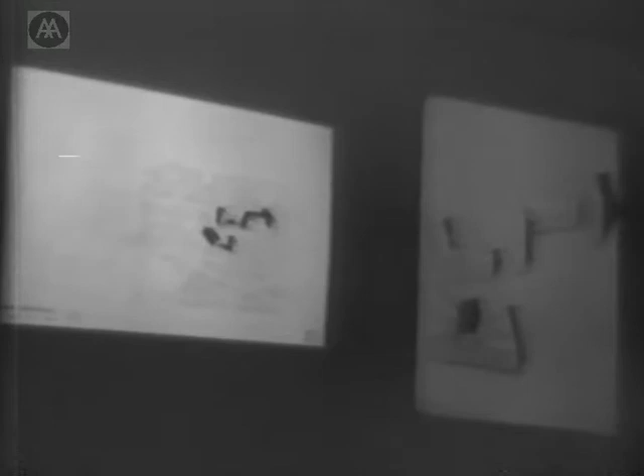Today I want to briefly talk about Twin Parks Northeast housing in the Bronx, which began shortly after I had completed the Westbeth artist housing. Westbeth was 13 interconnected buildings that used to belong to the Bell Telephone Company in West Greenwich Village. It was a rehabilitation of those laboratories and offices for artist studios and residences, in which in 1968 we created loft-type spaces in which the residents could adapt the interior of the space to their own needs.

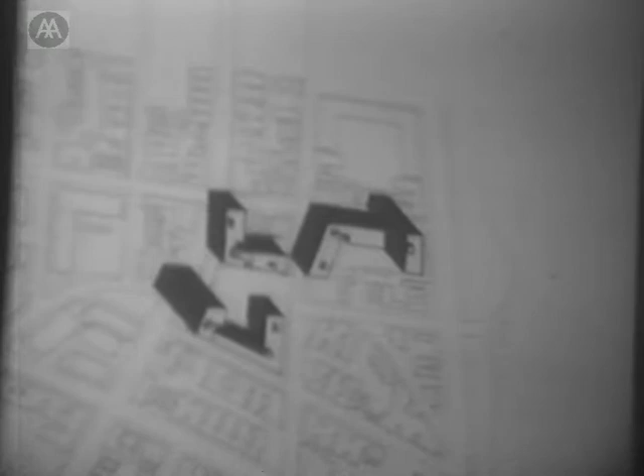So when we began Twin Parks for the Urban Development Corporation, it was hoped that some of the breakthroughs we had made with the Federal Housing Administration in terms of eliminating their specifications for room sizes, size of closets, size of doors, location of hardware, etc., could be carried through into public housing for low and middle income people that were not in a specific category, such as Westbeth was, everyone said, well, it's for artists, so you can do something there.

So we tried to carry through some of those ideas into Twin Parks, but we met with enormous opposition in terms of just making lofts in which people could then put in partitions and divide the space as they were. So these are pretty ordinary standard apartment units.

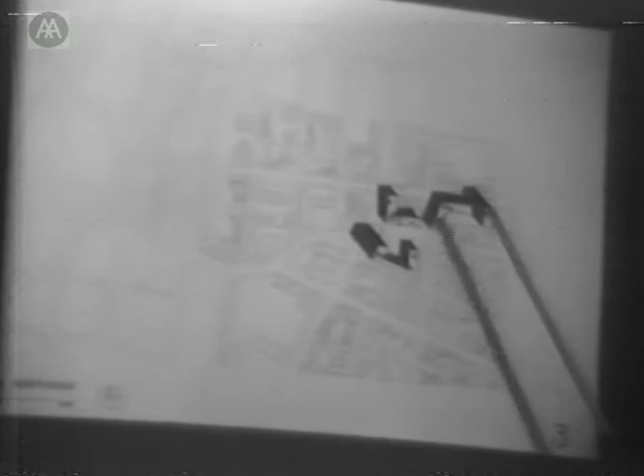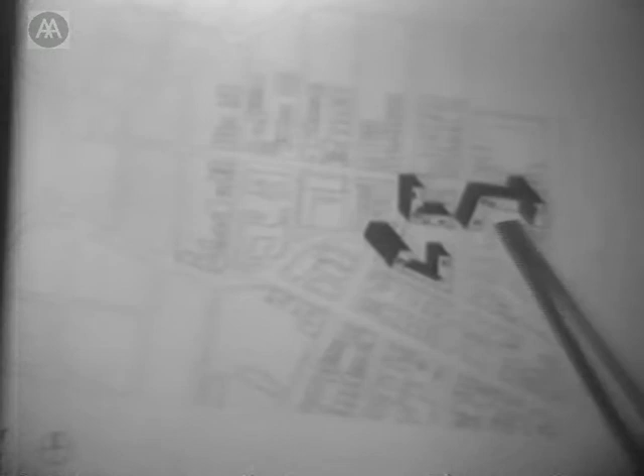The sites, and this is called scattered site housing, is on three pieces, 3 blocks, in which there's a shift of grids from the south to the north. And what we tried to do was to recognize the grid to the south in the Bronx as well as the grid to the north.

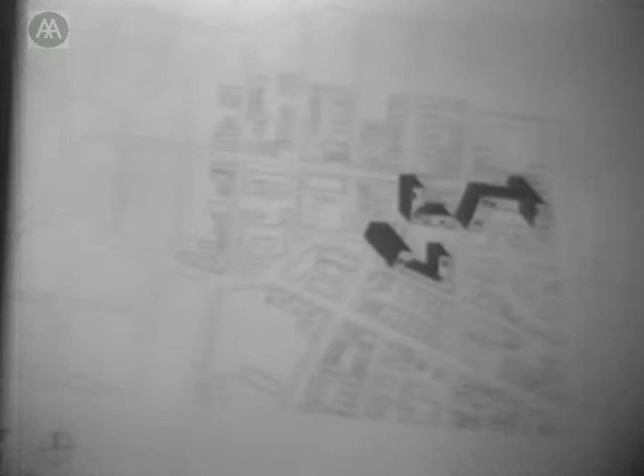We created a series of buildings which made for a new open public space, a plaza over a car park area, in an area which was totally devoid of any open public space. So the new open space existed in relation to housing which is all around.

Now, the study model shows one of the other things we were trying to do, since the units kept getting smaller and smaller because the FHA minimum room sizes became the UDC maximum allowable room sizes. So the one amenity we felt we might achieve within the individual dwelling units was to give the maximum amount of light and air. In the model, you see the way it was designed in terms of the glazed surface to the solid surface. Of course, this is not the way it was built.

We went through about 2 years of fighting, and finally - I won't go into the whole history of how the UDC was organized and functioned - but the building contractor was in fact then the building's owner. He became the developer, and although one did working drawings and got all the approvals from the appropriate authorities, when it actually came to build the building, he said, well, I'm the owner and I'm going to build it the way I want, and if I don't want to make so much glass because people will break it, and operable windows are more difficult at the size you designed.

Now, the second project I'd like to show you quickly is something which is still under construction, and which is also for a state organization, Mental Hygiene Facilities Corporation of New York State. None of these state organizations exist any longer, or if they do, they don't have any building program. There are no social programs at all in the northeast portion of the United States, but there used to be. And this was called a school. In fact, it was partially a hospital and partially a school, and originally was designed for 750 residents. Of course, we knew at that time it would never accommodate the full residential population, and that in fact these two units would never be built.

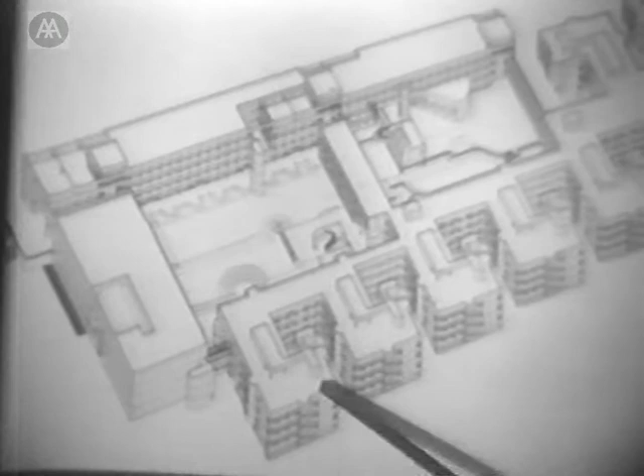So it was designed for 6 residential units on one side of the courtyard in relation to the educational, therapeutic, and outpatient services and physical education and administrative spaces. In fact, the program was cut back for 380 residents, and there won't even be that number now, because much of this will be used for outpatient services as well. But what is now built are the 4 residential units, as well as all the outpatient, therapeutic, and educational services.

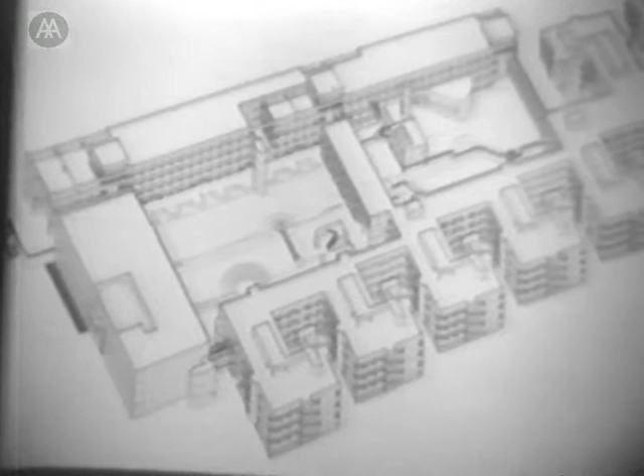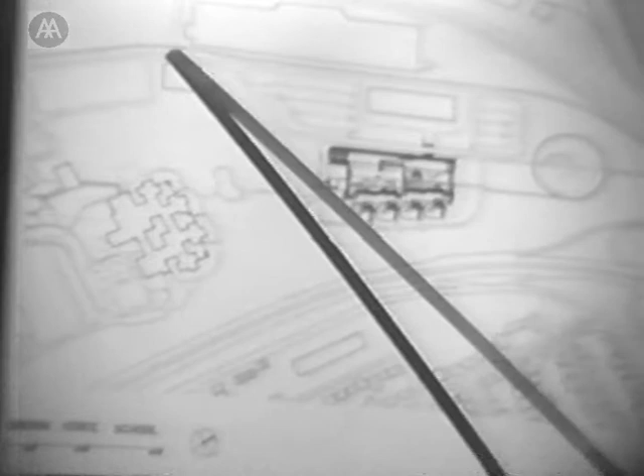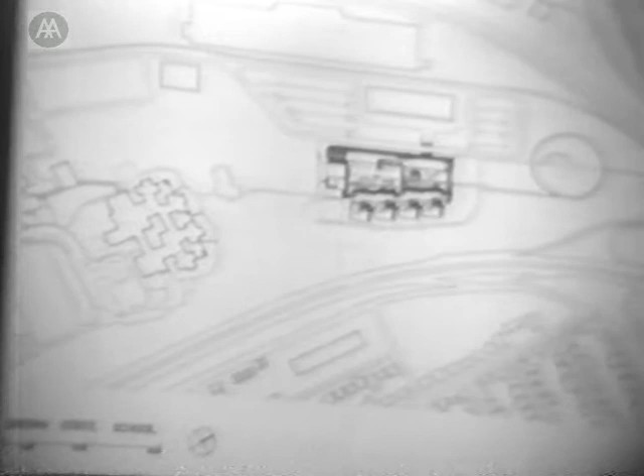Now, the building, as I mentioned, is basically organized with a long building which has a cafeteria, 3 points of entry, which then move through, 2 by bridges across the courtyards, and 1 through a bridge through the physical education facility and into the residential units. The building turns inward, as it were, into the courtyards, creating its own context. It's not like Twin Parks, because here there are no relevant architectural points. There's nothing to relate to. It's a building in isolation.

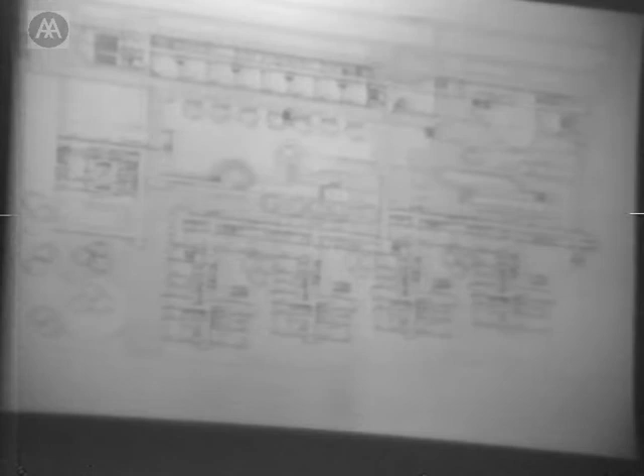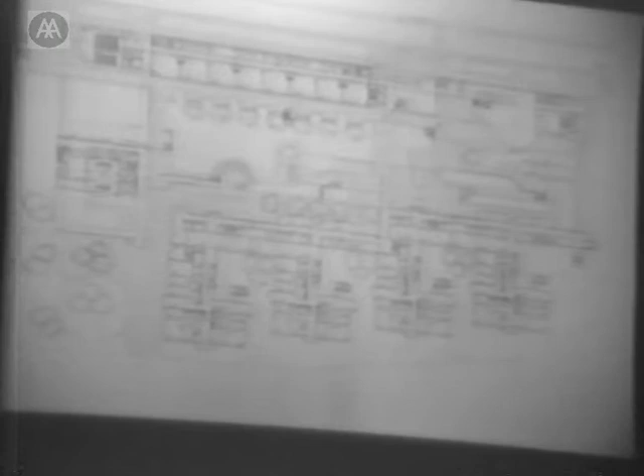And so the context is one which it creates within itself, so that when people come out, they're not on the highway. There's this feeling that people are going to get killed by crossing the highway. That from the classrooms and the outdoor classroom areas, as well as from the residents, on 3 of the 4 floors, the handicapped and physically disabled can get to ground level by ramps.

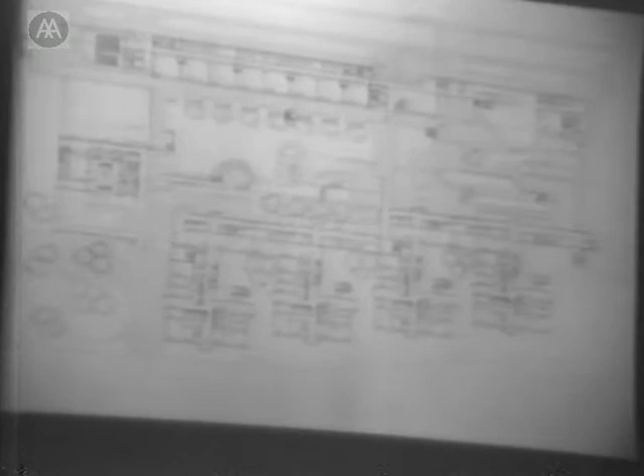Now, this is one of the residential units, and a view from the north with the support services spine then linked at the north end to the residential units.

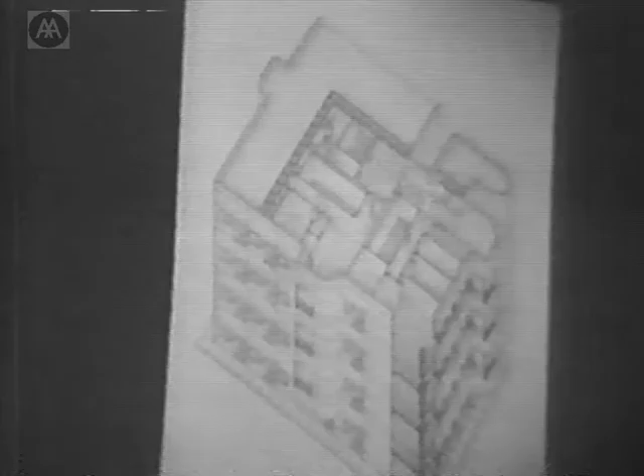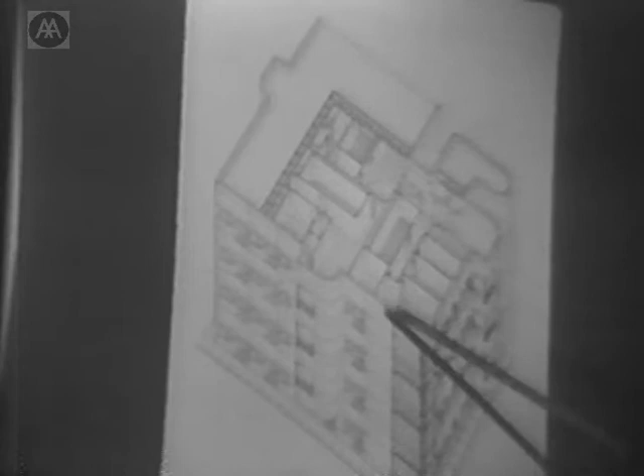This is an axonometric of one residential unit, divided with 4 levels, and within each level there is an apartment for 8 people, a two-bedroom, 4-bedroom arrangement pinwheeling around a nurse's station, so that each of the 8 people have their own living room, bathrooms, and bedrooms. Each of these 3 apartments for 8 makes 1 living unit for 24, which then has its own dining facilities.

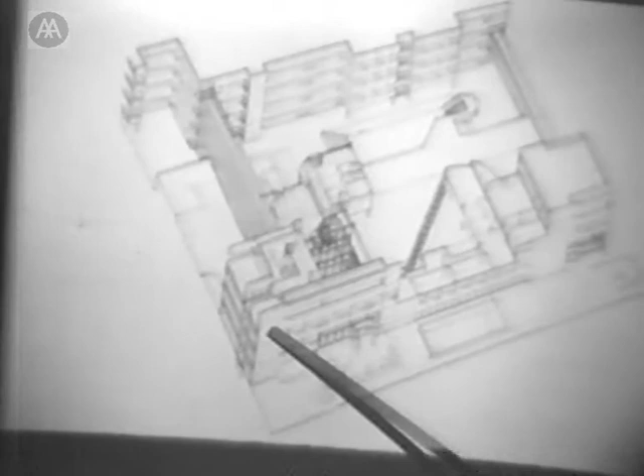Kitchen, and activity spaces. In this drawing, which is an axonometric cut through a portion of the support services spine, one sees the cafeteria, which opens out into the northern courtyard, and a small house, which is a domestic training house.

It's a place which has a bedroom, a sewing room, a kitchen, to simulate what a kind of normal, quote-unquote, environment might be, so that the residents who come here either for a short time or even for a long time can learn to function in the Bronx where they live.

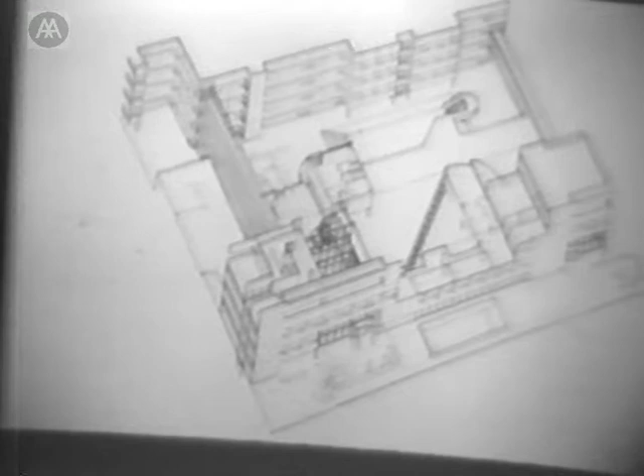Most of the people would come from the Bronx and go back to live in their apartments with their families there. The residential units are also designed so that they can be used by families as an overnight situation where families can come, stay with their children, and then return home, or that it can also be used for outpatient daycare clients as well.

Throughout the building, the aluminum panel curtain wall is designed to accommodate either the heating cooling unit or glass, so that at any time in the future, should a space need be changed in terms of its function, one just plugs in a new cooling heating unit and removes the glass.

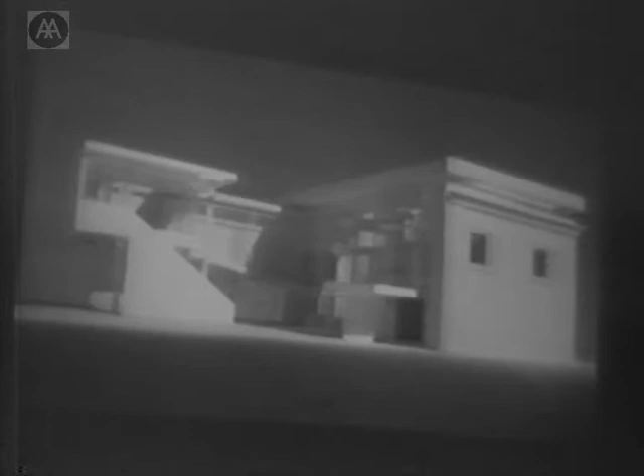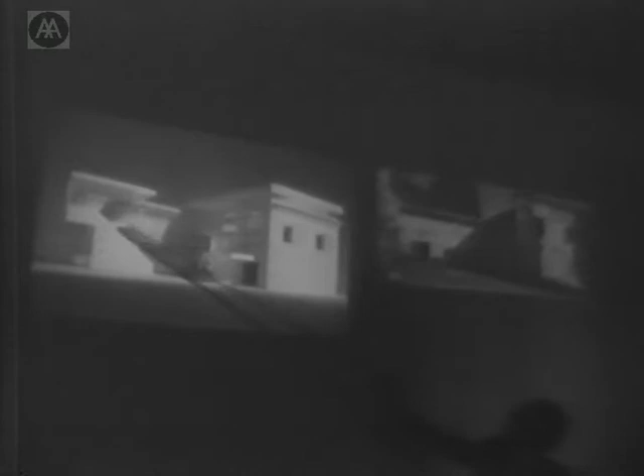But in order to get 3 levels of gallery space within the stable buildings, we lifted the new roof above the cornice line, in order to be able to pull across and ramp up to a gallery space, which then continued to the 3rd level, keeping the enclosure on the courtyard that had existed there with the stable buildings.

When I was asked to be the judge and jury for the Shinkenchiku competition in Tokyo, I was working on what's called an Atheneum, a visitor's center in New Harmony, Indiana.

New Harmony is a town which was settled first by the Rappites and then by Robert Owen in 1824 in southern Indiana, and is probably the only built utopian community in America. In 1825, there were about 950 people who lived there, and today the population is about 955. So it hasn't changed much in the last 150 years, except that it was a fairly poverty-stricken community.

The farming, which was the basic occupation for most people, has gone bad, so that about 7 or 8 years ago, they realized that what they had and what was unique about it was that it hasn't changed very much. And from a tourist point of view, it was fairly interesting.

A man came to New Harmony with some funding from the Ford Foundation and the Owens, and saw the possibilities of making a kind of Williamsburg of the West, so that all of the existing houses were put back where they were originally if they'd been moved, and restored. Although it's not like Williamsburg in that people walk around in costumes, people actually live there today and function there today in a normal manner.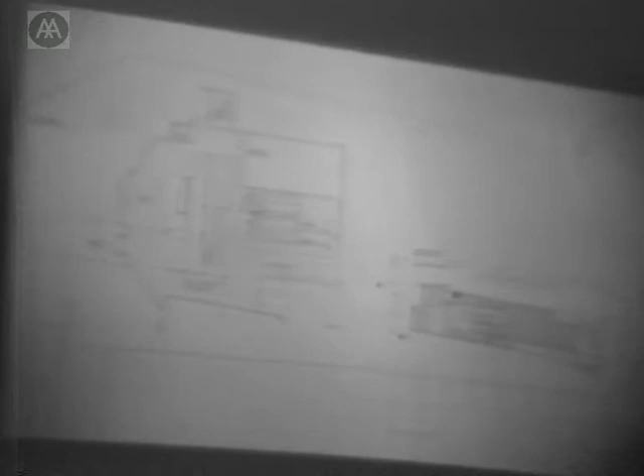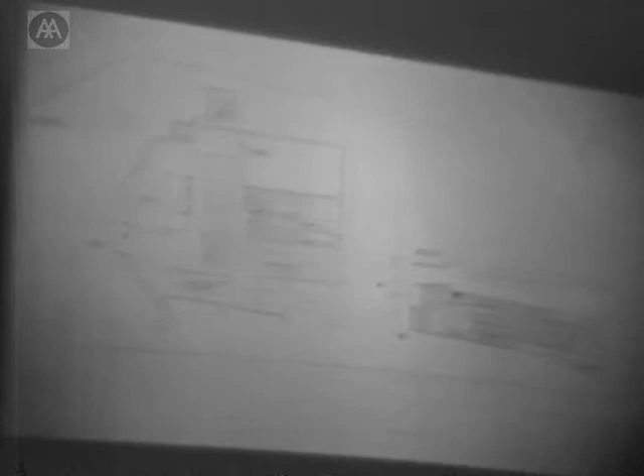The one new building they needed was a visitor center. This building, which is just beginning construction now, is based on circulation, because they expect 5,000 visitors a day to move through it to see a film on New Harmony and then take a walking tour of the town. Whether it will actually happen that way, we'll have to wait and see.

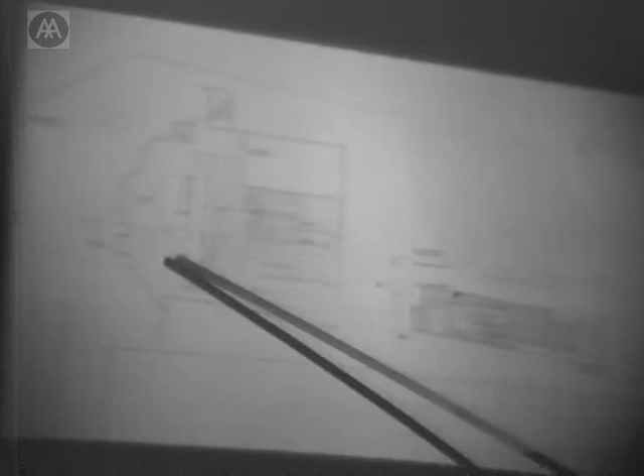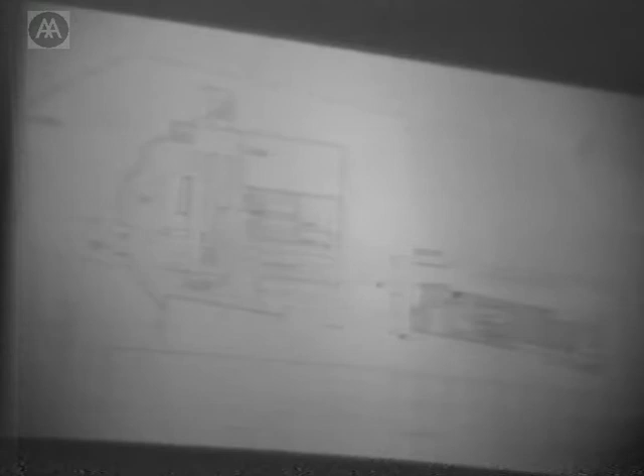At any rate, it exists on a plain where the Wabash River bends around a cornfield, and one comes in, enters, and buys a ticket to the film and the tour of the town, and ramps up to a theater which is above this portion of the ground level, and sees a 15-minute film on the history of New Harmony, then goes through a number of exhibits which exist at the ground level and the upper level.

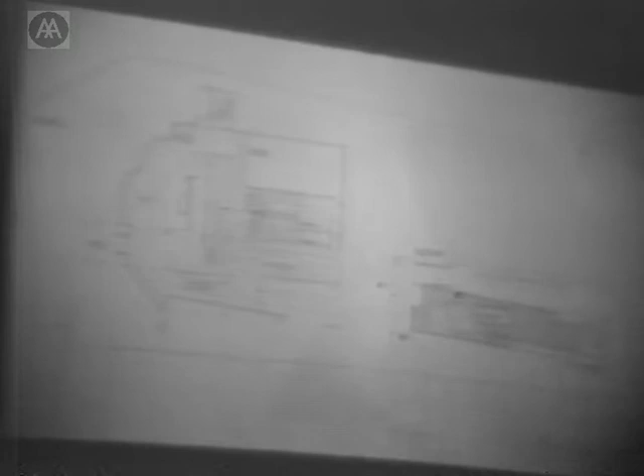There's a rare books museum on the 3rd level, and then one moves out past — this is the only plan I have with me, I'm sorry — on a bridge past a restaurant where you can stop and have a Coke or something to eat, and begins a walking tour of New Harmony. There's an outdoor amphitheater which will have concerts and theater events overlooking the river.

Since the number of people who will circulate into and through the building is pretty much undetermined, one can move out from any number of the exhibition spaces onto terraces overlooking the town and the river. At every level there are outdoor spaces from which to move through the building and out to the restaurant and to the town.

Well, that's the first part, and that's where I was at when I started thinking about a program for the house at an intersection.

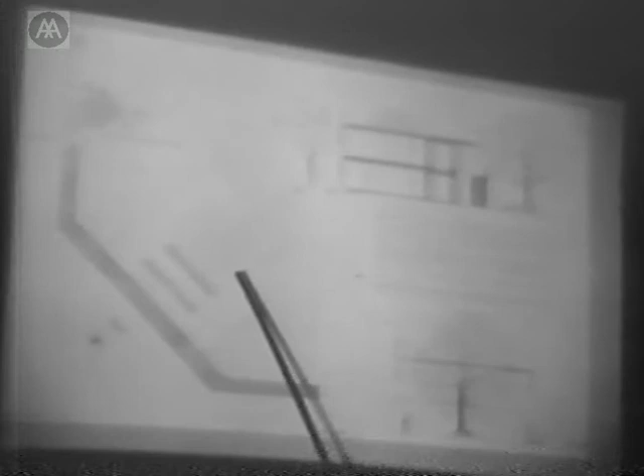When I first saw this house, I was struck by it, and I thought here is a kind of relationship between man-made and nature, between something old and something new, between a kind of private domain and a public domain. It's the only entrant which is an architectural statement of a very subdued, low-key nature.

It is partly hidden, partly visible. It's related to the intersection and yet apart from it. It's talking about nature and the movement of the sun around. It opens out and yet it has a life within.

The way in which the square is cut away on the ground level, on the east side for the morning light—I'm sorry, on the upper level on the east side—and on the ground level plan where it's cut and yet covered in terms of the evening terrace.

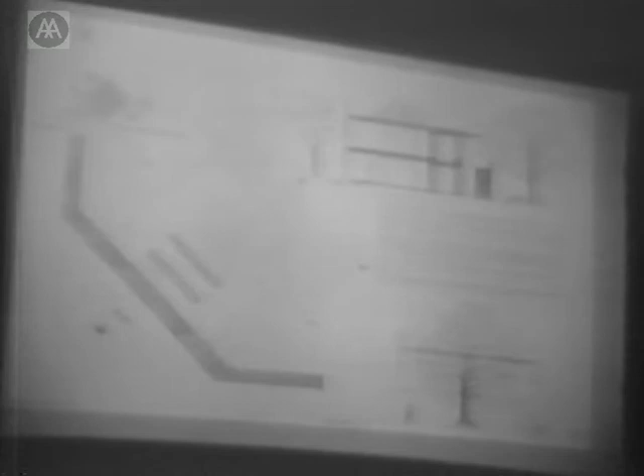It remains an idea on one level, a diagram of a house, because there are no walls, there are no partitions. It doesn't tell you how someone would live there. It leaves that up to the occupants. On the other hand, it's specific.

It's specific in its conditions. It's specific in its statement about its presence in a particular place. As you'll see when I show you the rest, it's unique in that it stands out because it is a very beautiful house, and at the same time, it is an idea about building as well as being specific.

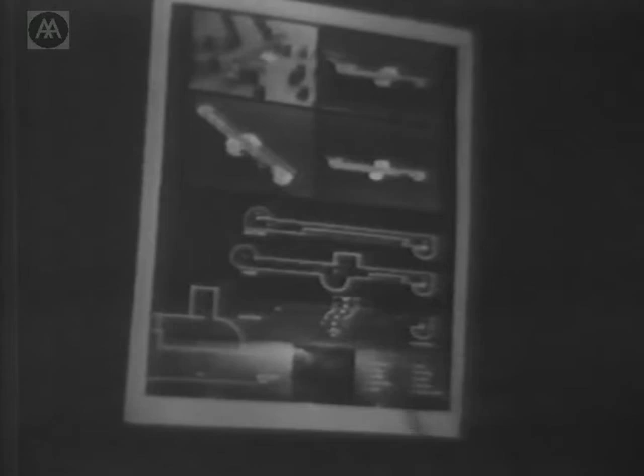And it really fades into the dusk. I found this series of drawings to be, perhaps for me, more convincing than the plans, which started to be so much more specific. And I wondered about certain things, because the idea seems to have a more non-specific form, rather than bathroom and kitchen and garage and balcony and places for bed. So I guess this is one of the problems when you say house, that it has to become a space which is labeled, whether in fact one actually puts a bed there or not—that you have to say this is a place for the bed, this is a place for the study, this is a place for balcony. Because for me, the quality of this is something which is at one time there and another time not there. In the same way, one would have thought that the organization, which one might see here, might have a similar quality.

Another second prize is Akio Kawasaki from Japan. And when I saw this, I said, oh my God, the power of publication. This is a white and gray house, a house for an intersection.

And I have to tell you, there are many entries which seem to reflect far too literally what had just come out in magazines. This house took what had come out in magazines and really made it into something else. It took what I thought was a rather uninteresting article—so the conference in California was interesting, somehow making it an issue for me wasn't very interesting—but it took all the publications of the kind of white and gray confrontation which existed at UCLA, must be two years ago, and made it into a polemical situation, which in fact is quite interesting.

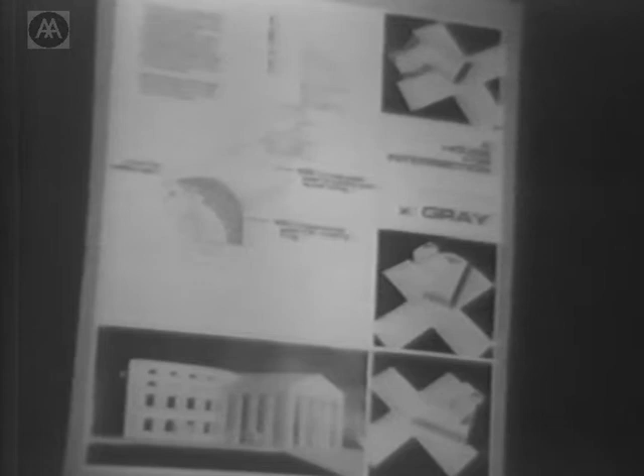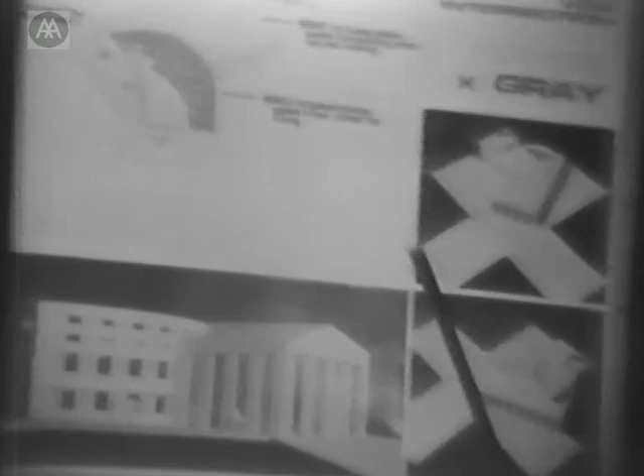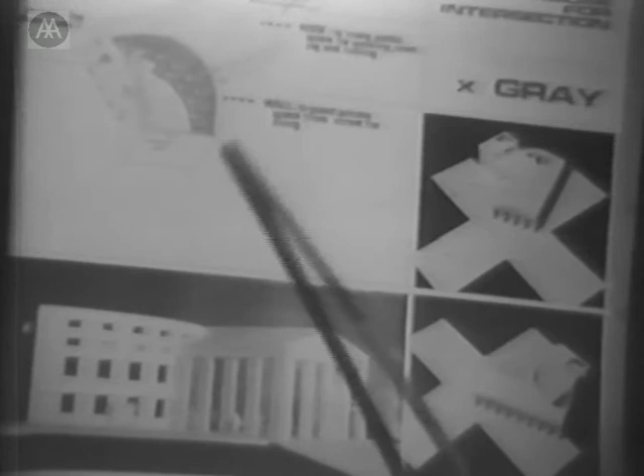It's a kind of confluence of Palazzo Massimo and the Parthenon, placed in a way where the Palazzo Massimo still turns the corner, and the Parthenon bisects it and comes through into it. There's a street for pedestrians, and it's really a totally pedestrian scheme because he's blocked up the street and made it a way through, I don't know from where to where, but it probably doesn't matter. I thought the nature of it wasn't equal, since he's bisecting it with a priority direction along one diagonal axis and turning the corner in another way, but that's a detail and not too important.

The second place is Raimund Abraham, a house with two horizons: one horizon, the ground level moving through, and the other horizon, the heavens, which exist within the clouds. I don't think this slide does justice to the drawing, which is an incredibly beautiful black and white drawing, in which this intersection is kind of between heaven and earth, and nowhere, just out wherever you might like.

Someone said to me that surely I had written this program after Peter Eisenman was here in London and talked about his house, which he's doing somewhere in Michigan, I guess. Well, I thought about that, and I said maybe it had something to do with it, but it certainly wasn't influential. The last second place winner, however, is Peter Eisenman, who has done a house which is really a house of 5 intersections, and which I tried not to give any prize, but I like the house very much.

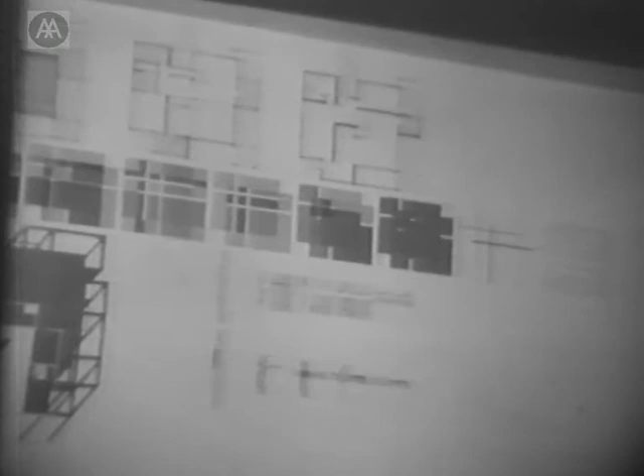Concerned with the way in which light comes into the spaces as a way of moving form.